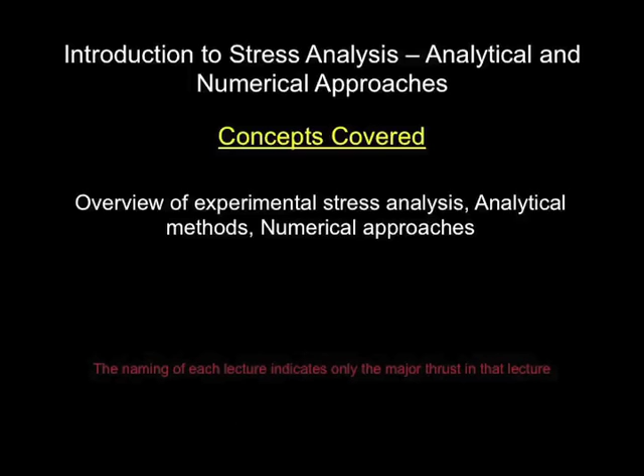This lecture is on overview of experimental stress analysis, and this slide shows in a nutshell what experimental stress analysis is all about. What we see here is stress patterns observed in a 2D model of a human femur.

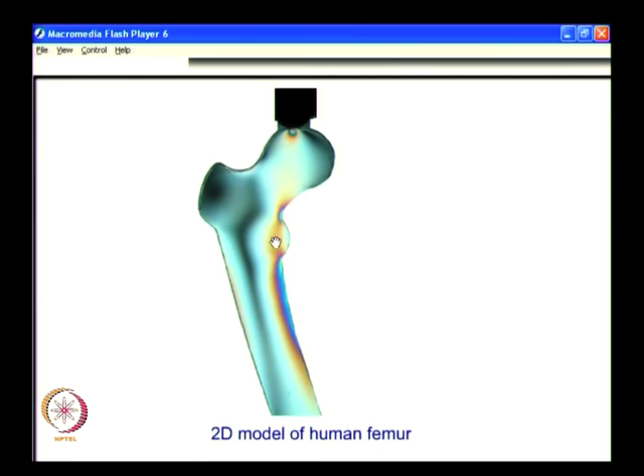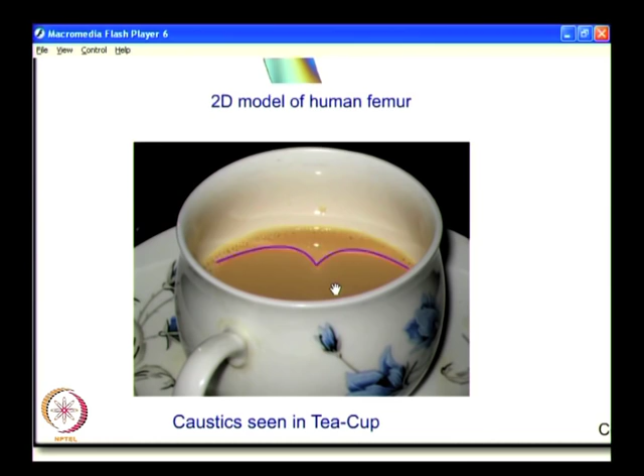What you see on these two corners shows that you need to use physics in applying experimental techniques. So what is done is, any physical information which could be exploited for measurement is identified, and that is translated into an experimental technique. What you see here is a cusp in a teacup, seen as a silver line. What happens is, when light gets reflected on the curved surface, it gets reinforced and you have a cusp, and this can be seen on any shallow filled container with appropriate lighting. This phenomenon is called caustics.

This physical information is exploited in a technique called the method of caustics, which is used for measurement of high stress concentration. How it is done, we will see as part of the course.

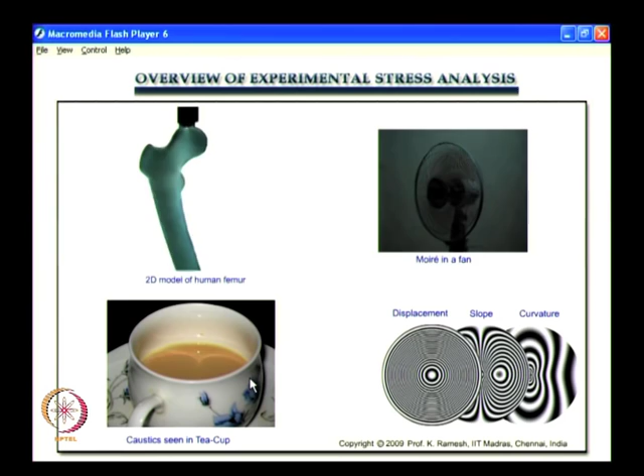So what is emphasized here is, in experimental stress analysis, I can measure stress information, displacement information, and also strain information, though it is not shown here. What is emphasized here is that for each experimental technique there is a physics behind it. So you need to appreciate the physics, understand how this physical information is exploited, and that is what we are going to see in the lectures to follow.

But before we proceed further, we need to know what stress analysis is all about. The term stress analysis, in the complete sense, encompasses the determination of 6 stress components. Why are there 6? Why do I say that you have 6 stress components?

Suppose I take a member like this and apply a tension. You all know stresses are developed, and what is the value of stress? Someone can answer. Suppose I apply the load as P and the area of cross section is A, what is the value of stress? Where are the 6 components? You are only saying one.

What you have in this simple example problem is that stress is a tensor of rank 2. So you have 9 components. Of the 9 components, because of symmetry, you have only 6 independent components. So in a simple tension test, like what you do on a slender member, you evaluate stress and it appears to be a scalar, P by A appears to be a scalar, and that is what you have learned in a simple course in strength of materials.

But what you should change in your thinking is to go back and fill in the components in the stress tensor. So what you find is, I find one stress component, all other stress components are 0. That is why, because stress is a tensor of rank 2, you have 6 independent components.

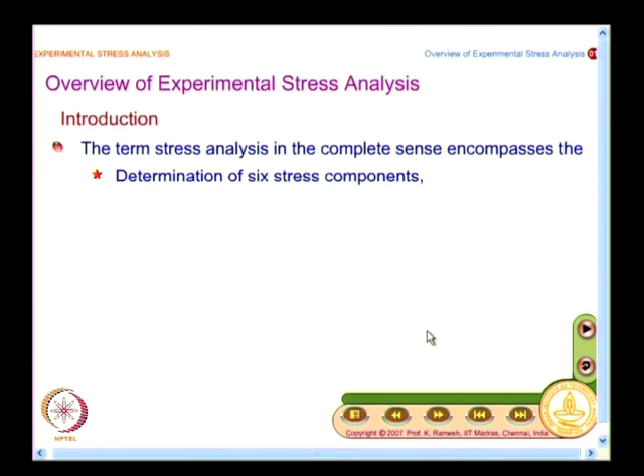So when I say stress analysis, I should know the stress components. Then I also need to know strain components, and strain components are again 6, because strain is also a tensor of rank 2. So I need to get stress components, I need to get 6 strain components, and it is also desirable that I get displacement components, and displacement components are 3. In what way do I want this information? Suppose I take this rod and pull it, I want this information at every point in the model.

So what I want is, for every point in the model or component, I want all of this information. In this simple case the stress component is only one. If I keep it vertical, it's sigma y; if I keep it horizontal, you label it sigma x. If you have x and y as horizontal and vertical, you will have sigma x or sigma y stress components. What you need to understand is stress is a tensor of rank 2, so whatever loads you apply, you should be able to identify the components. And I want this information for every point in the body.

Right now let us not worry about the values near the place where I hold them, where I grip them. Away from the point of loading, we will worry about it. When you say this P by A, I know it everywhere and it is constant, and such a solution—if I give the xy location and I am able to find out the values of stress—I call that a closed form solution, because at every point I want to find out, I have the answer.

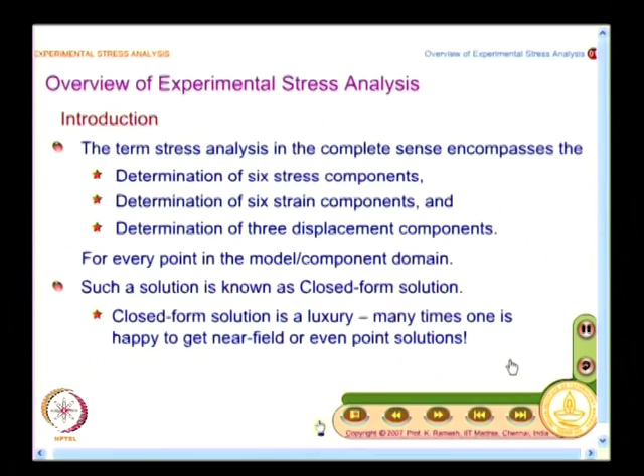And how can this stress analysis be carried out? You could do this by analytical methods, by numerical methods, or by experimental methods. Can you take a view that you will always use analytical method, or always go to numerical method, or being an experimentalist use only experimental methods? We cannot take that kind of a prejudiced view. Each approach has certain characteristics that could be effectively exploited.

Few of this we will see as we go by. In a very complex problem situation, one technique may not be sufficient. You may have to use a combination of analytical, numerical, or numerical and experimental, and that analysis is known as hybrid analysis.

What we are going to do now is see one by one: what analytical methods are for, for which class of problems, why do you do analytical methods; what is the advantage of a numerical technique; and when you go to experiment, in which class of problems experimental methods are ideally suitable. That is what we will see now.

Once you come to analytical methods, what is the advantage here? These are useful to get a conceptual appreciation of the nature of stress fields. If I take a member and pull it, I know it is subjected to tension, and in bending I want to know how the stresses are developed. But whether it is strength of materials or theory of elasticity, the range of problems that could be solved is limited.

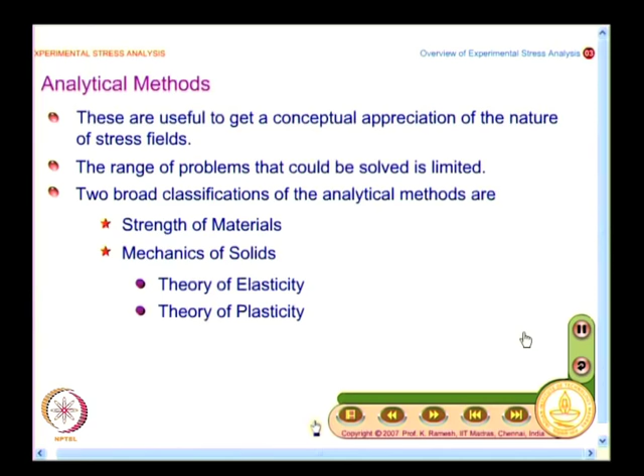The broad classification of analytical methods: we call them strength of materials and mechanics of solids, and in mechanics of solids you could classify that as theory of elasticity and theory of plasticity. They are very useful in getting a conceptual appreciation of the nature of stress fields, but the range of problems that could be solved is limited.

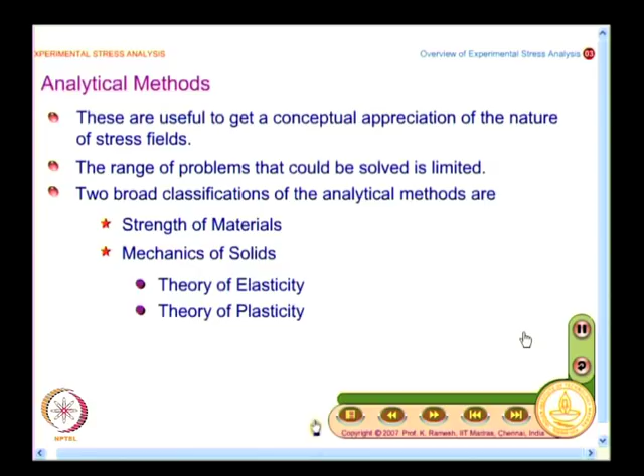You have all done a preliminary course in strength of materials. Do you know what is the basic assumption used in solving the problem on hand? Can any one of you answer? Plane sections remain plane before and after loading. You remember that has been taught in your earlier course? Yes, okay.

The basic information you need is for attacking the problems. One of the basic assumptions is that plane sections remain plane before and after loading, and with this we have solved a large number of problems which are slender in nature. It is very important. Suppose I take a plate and stretch it like this, I have no problem. Suppose I put a hole there, I cannot do it with strength of materials.

The moment I put a hole, the assumption that plane sections remain plane before and after loading no longer exists. So I have to be careful. That is why you always solve problems that are solvable. So in a strength of materials course, what you get is, you understand how an axial member, a bending member

or a circular shaft subjected to torsion supports the load. In the case of axial member, what do you understand? Suppose I take the cross section A and apply the load P, how is the force distributed? It is uniform, the entire cross section participates in the load sharing. On the other hand, if you go to a beam under bending, what happens?

What is the difference between an axial member and a member that bends? So this is where you have the answer. What you have here is, I have the member which bends and I find that stresses are varying linearly over the depth. And this is a very famous flexure formula, and what way did you derive it? You never went and solved differential equations. You cleverly avoided solving differential equations and hid behind the assumption that plane sections remain plane before and after loading.

And if you watch this problem, it is also very clearly shown that you have the end loads here, but you are only looking at a region which is interior to that, where only pure bending is applied, and the discussion is confined to pure bending. If I go to a cantilever, I have shear and plane sections do not remain plane before and after loading. They are not coupled, so you are still able to live with the flexure formula. And if you go for deep beams, you have to bring in shear effects.

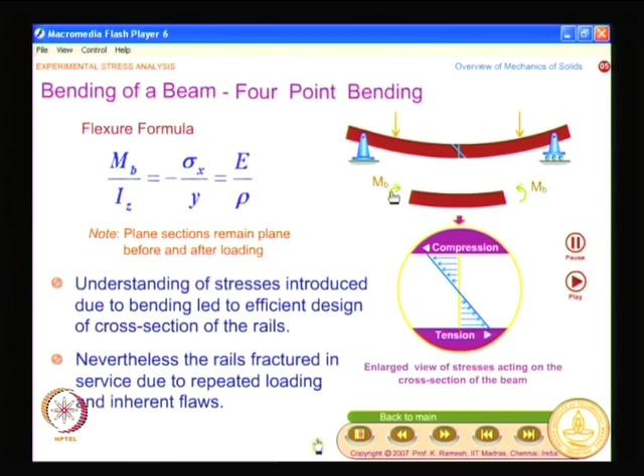So in a first level course, you will learn how an axial member supports load. That is why you have a lot of trusses being used in stadiums and very large halls. You effectively utilize the role of material completely, because all the material contributes to load sharing. The moment you come to bending, you understand that stress is varying linearly, so the inner core is not contributing to load sharing. And this is seen in how it is used in design.

If you go and see a rail cross section, you do not have a square block, because you know it is subjected to load on the top face, and it is essentially transmitting a bending load. Since the inner core is not participating, you have removed the material. So what you have done is, your analytical approach to the problem - you have not solved the problem of the rail to start with - but your understanding of bending, that stresses vary linearly and the inner core is not contributing, is effectively utilized in arriving at a shape of the rails.

Now what we will see is, at an introductory level, the approach is attractive, as one could understand how an axial member, bending member, or a circular shaft subjected to torsion supports the load. And once you come to circular shaft, you all know people use hollow shafts, very similar to bending, where the shear varies linearly. So in pure torsion you only talk of a circular shaft subjected to torsion.

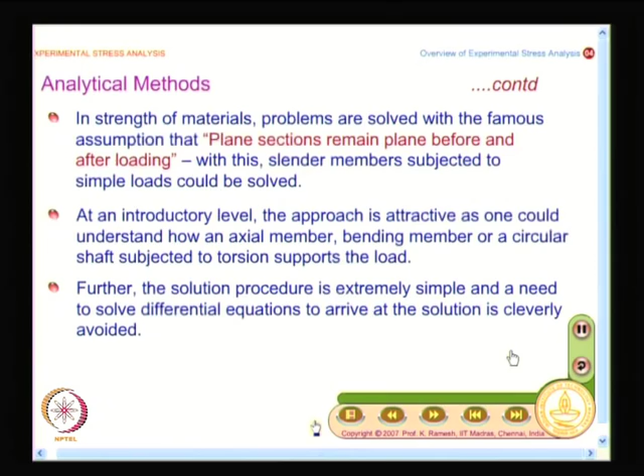Suppose you have a rectangular shaft subjected to torsion, that is shifted to the next course, it is not taught in the first level course, because we always want to have a very simplified approach to problem solving, and we have cleverly avoided solving differential equations. But nevertheless we have understood how an axial member supports load, what happens in the case of bending, what happens in the case of torsion.

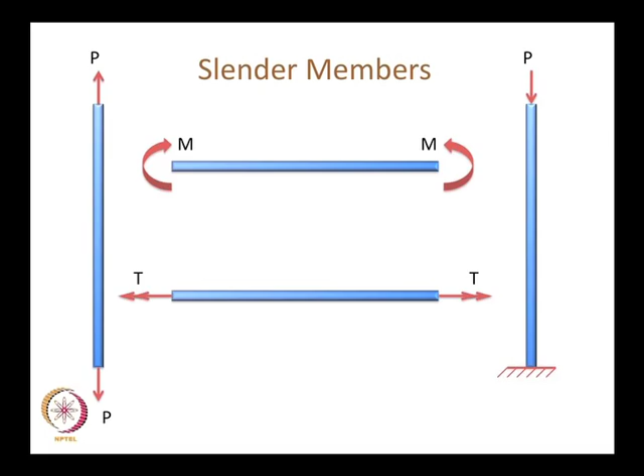So analytical methods are very crucial in giving a conceptual appreciation on very simple problems, but you will restrict to a class of slender members, you will not go to any other class of problems, and this is very effectively used in design. If you go to the second level course, you always use the design based on very simple idealization based on strength of materials.

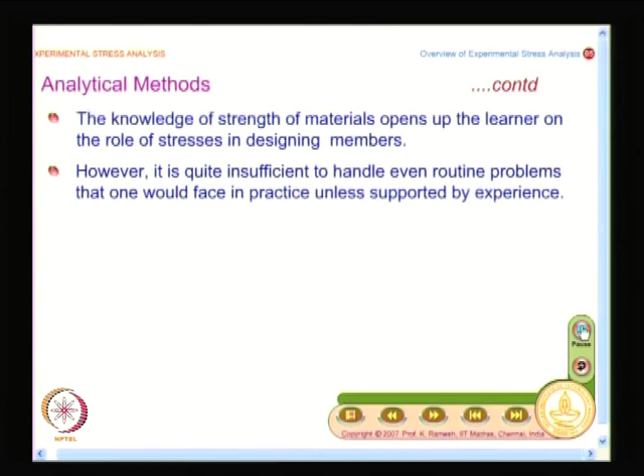So what you find here is the knowledge of strength of materials opens up the learner on the role of stresses in designing members, like I have shown you the rail where you have removed the material from the central portion because it takes the load only on the top and bottom fiber maximum.

Whether you have understood or nature also has understood solid mechanics - if you look at bones, they are hollow, the inner core is where bone marrow is developed, where hemoglobin is developed, and that has to be protected. So you have a hard shell. Your bones, if you take a thigh bone, it is subjected to bending, and in appropriate loading it will also have some level of torsion. So nature has already understood that when it has to resist bending or torsional loads, it can optimize its structures beautifully.

Because bone marrow is a very soft material, and if you really go and look at bone, people now say that it is a functionally graded material. It is not even just hard and soft, it is functionally graded, and they say tooth is also functionally graded. So nature has understood all this solid mechanics, and utilized it in many of its structures.

And as humans we try to unravel it and embed it in the form of mathematics and develop it as engineering tools. Now what happens, suppose the basic restriction is I assume displacements in the case of strength of materials, and you can't live with that.

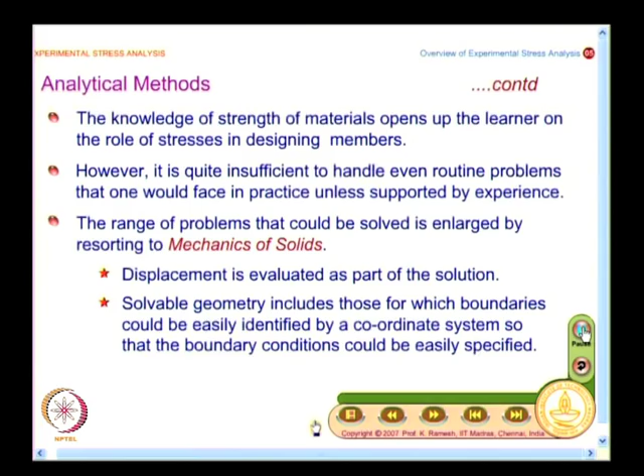So when I go to theory of elasticity, where I am able to idealize, I look at a situation where I remove the restriction on displacements and evaluate displacement as part of the solution. Even there I need to have infinite boundaries for a problem like this, only then will I be able to solve.

Mathematically the distances are far away, but physically it could be a very small hole. This closely resembles, and this solution is possible. And plate with a hole is a very important problem.

You all learned this in one of your design courses - when I have riveted joints, I have a series of holes. So the idea here is, as an analytical method, you have been able to find out the presence of a hole, how it influences the stress field near the hole.

You are able to get an analytical expression, and this will be a function of x and y. So if you plug in x and y, you will be able to find the solution at every point in the domain, okay, which is not the case when I take a finite geometry. This finite geometry, it is not possible to solve by theory of elasticity.

On the other hand, other geometries, like suppose I have a circular disc and a diametral compression, this you get a closed form solution from theory of elasticity.

Compare: I have an axial member, I pull it, I can solve it by strength of materials. But the same axial member, suppose I have a hole, I cannot solve it by strength of materials, I have to depend on theory of elasticity. Even in theory of elasticity, the hole should be as small as possible. On the other hand, even if you don't have a hole, if the geometry is changed because of the way I apply the load, plane sections do not remain plane before and after loading, so strength of materials cannot handle it either.

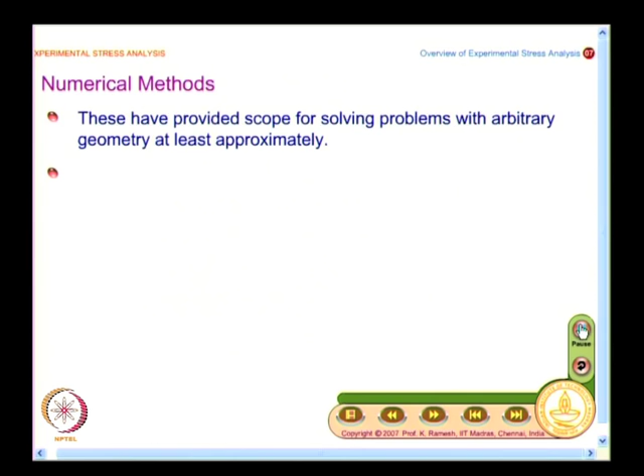And you have many numerical methods. Many of you might have done finite difference, then you have the most versatile finite elements, with very many packages available for you to attack problems, and you also have boundary elements, and very recently mesh free methods have come.

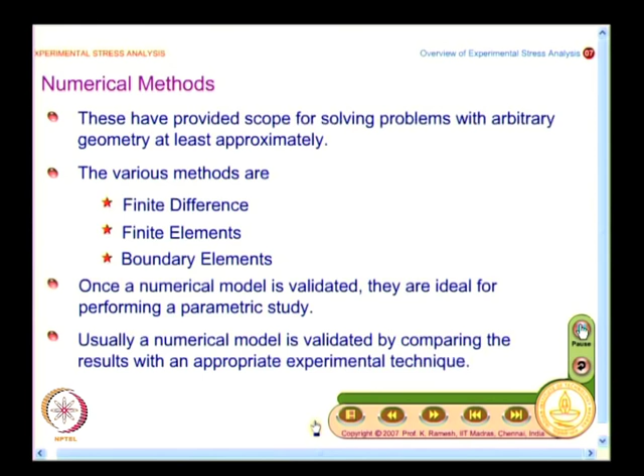And what you find is, when I am having a numerical approach to a problem, the numerical model has to be validated. Unless the numerical model is validated, if the boundary conditions are not verified, you are solving a different problem.

So for any numerical approach, you will have to validate whether the procedure is all right, but the greatest advantage of numerical methods is, once the procedure is validated, it is an ideal way to do a parametric analysis.

In a design, if you have several geometry factors, you would like to vary them, or change the load case and find out how the system is going to behave. Conducting experiments for each one of the configurations would be difficult. So you do an experiment, verify the discretization, verify the boundary condition, then do a parametric analysis by a numerical approach.

Analytic approach provides you conceptual appreciation of what axial load supporting members are, how they behave in bending, how the stresses vary over the depth, and in shear how the stresses vary. That understanding is very crucial in translating many of the designs you see across.

They could be simplified to any one of the slender members as a first approximation, and you can get some insight into what is happening. But if you want a detailed solution, you have to go to theory of elasticity, where you do not have the restriction on the displacements.

You have simply connected and multiply connected problems. In multiply connected problems, you have to bring in uniqueness of displacement as an input, otherwise you cannot solve the problem. But leaving that apart, you do not put any restriction on displacement, and you evaluate it by solving differential equations.